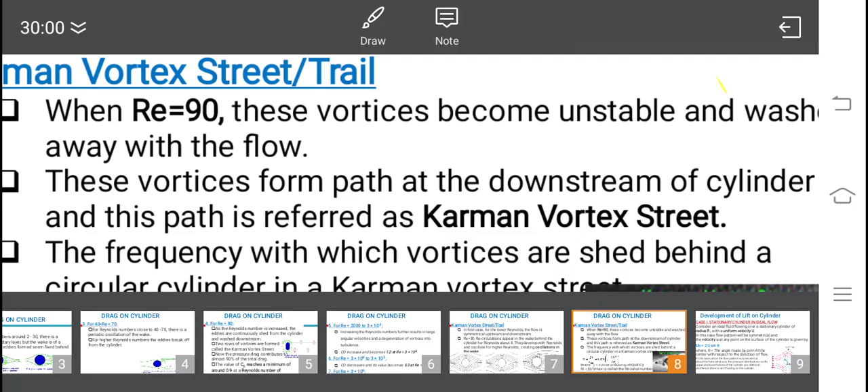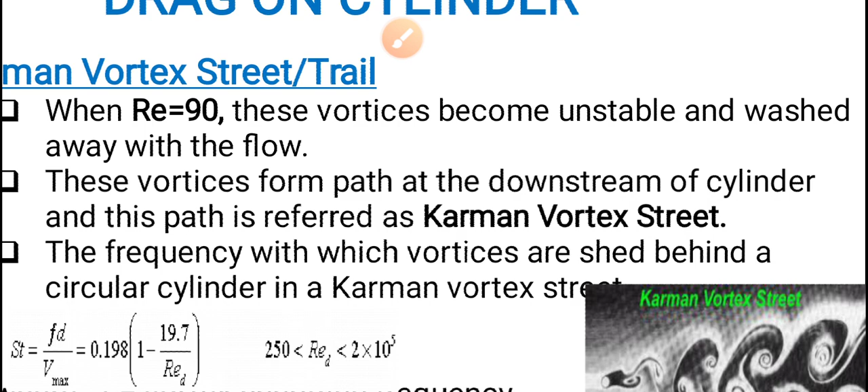Yesterday, in the last class, we were discussing the Karman vortex street. The frequency, Karman vortex street frequency, is F. When we divide it by V maximum, we get the Strouhal number, which is a dimensionless quantity, given by S suffix T equals Fd divided by V maximum, equal to 0.198. This is an empirical formula: 1 minus 19.7 divided by Reynolds number, where Reynolds number is greater than 250 and less than 2 into 10 to the power of 5.

We can see the vortices which are shed behind a circular cylinder in a Karman vortex street.

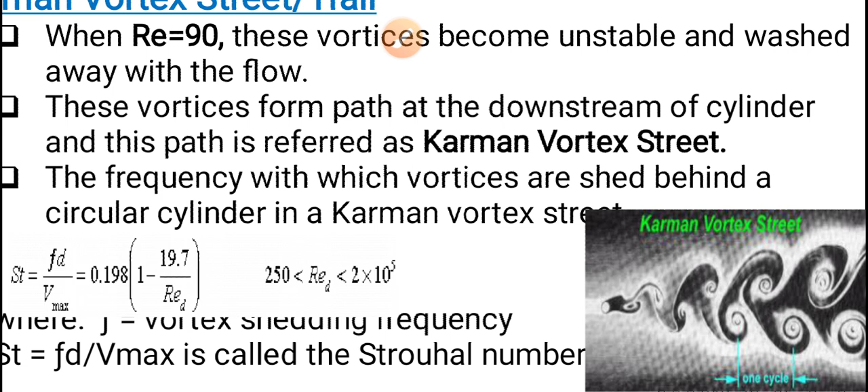Now one more thing in that Karman street, I would like to point out: singing of wires. What is singing of wires? When these vortices are formed and washed away onto the downstream side, there will be lateral vibrations on both sides. Because of these vibrations, there will be resonance caused when power cables, electrical wires, tall chimneys, and high-rise structures are exposed to heavy wind.

Because of these lateral vibrations caused at the resonance stage, they will cause harm to these infrastructures. This phenomena of singing, the musical noise produced by power cables or electrical wires when they are exposed to heavy wind and subjected to lateral vibrations, is known as singing of wire.

What is the word? Singing of wire. You must have come across this when going near an established transformer. For example, when you go to Loni, at Babaleshwar, there are big power cables and a transformer erected there. If you wander there in the evening or morning, you will hear some noisy musical sound; that is known as singing of wire.

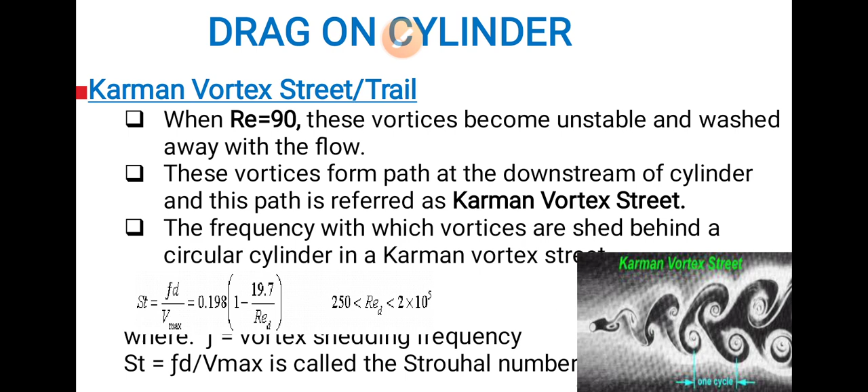Next, we will see the development of lift on a cylinder and sphere.

Case 1: stationary cylinder in an ideal flow where viscosity is absent. In that case, the pressure distribution as well as the flow pattern is symmetrical on both sides, as shown in the figure.

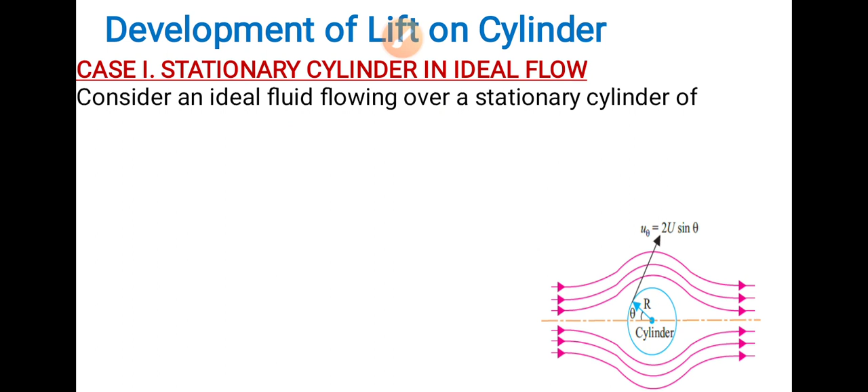Consider an ideal fluid flowing over a stationary cylinder of radius r with uniform velocity u meters per second. In this case, the flow pattern will be symmetrical, and the velocity at any point on the surface of the cylinder is given by u theta equals 2u sin theta. It is always tangential to the cylinder, as shown in figure, where theta is the angle made by the point at the center with respect to the direction of flow.

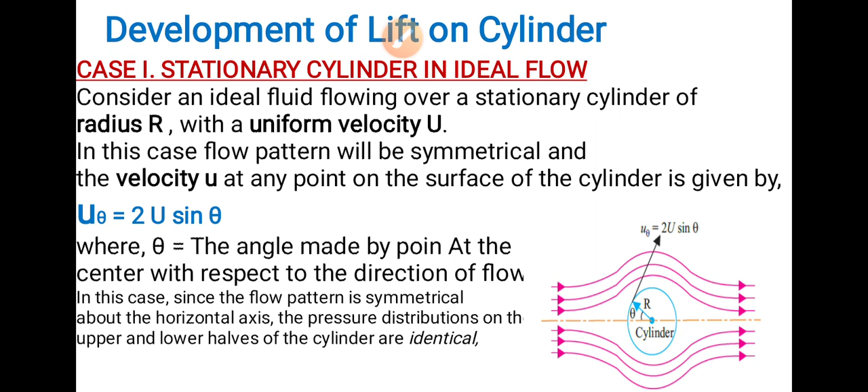In this case, since the flow pattern is symmetrical about the horizontal axis, the pressure distribution on the upper and lower halves of the cylinder are identical because of the symmetry with respect to the horizontal axis. Hence, there is no lift acting on the cylinder.

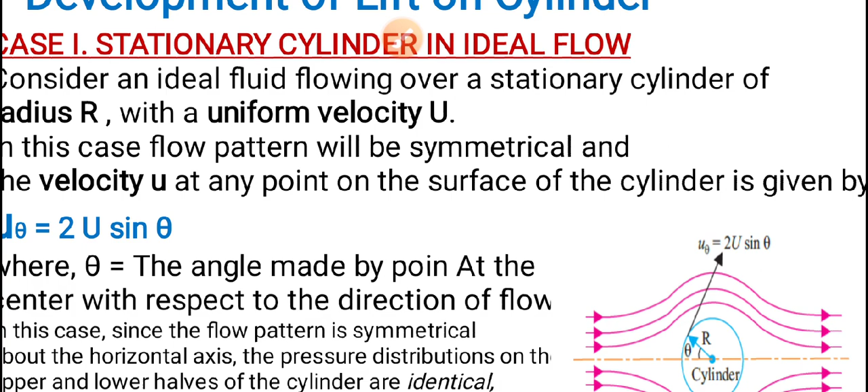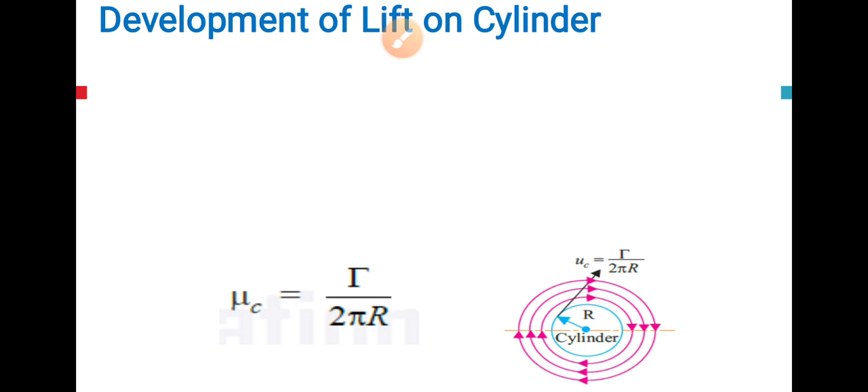Then, when a constant circulation is imparted onto the cylinder, the flow pattern around the cylinder consists of streamlines which are a series of concentric circles, as shown here. The peripheral velocity on the surface of the cylinder, because of the imparted circulation, is mu c equals circulation upon 2 pi r. This symbol resembles gamma, known as circulation, where capital R is the radius of the cylinder, and mu c is the velocity.

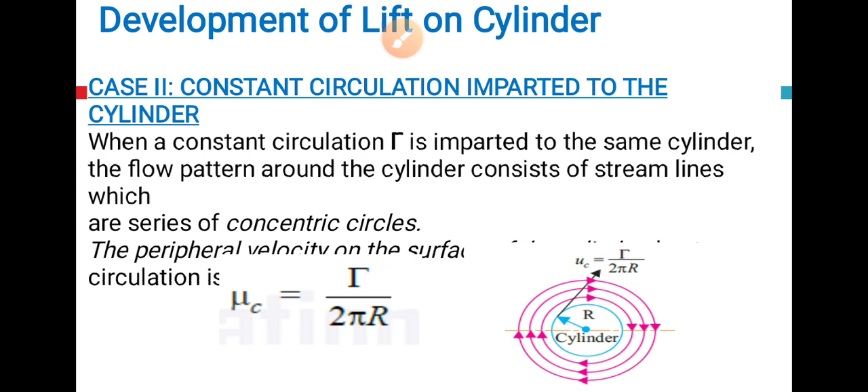Then the total velocity is not mu c, in fact uc. Therefore, the total velocity on the cylinder, when we superimpose these two flow patterns, that is the composite flow pattern, the above two flow patterns are superimposed one over the other, then a composite flow pattern as shown in the figure will be obtained.

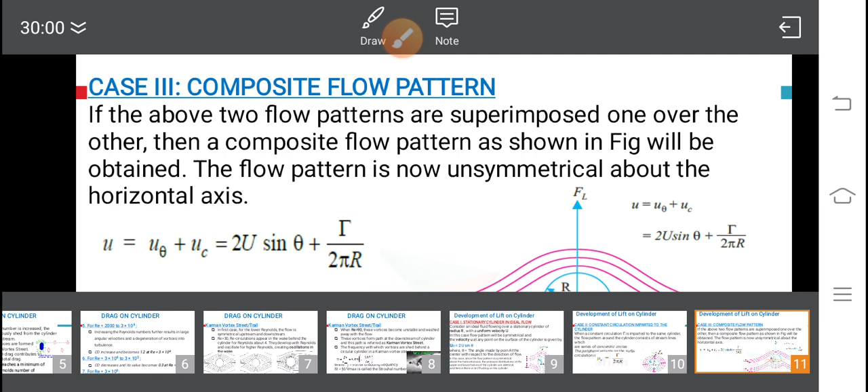The flow pattern is now unsymmetrical with respect to the horizontal axis. You can see with respect to the vertical axis it is symmetrical, whereas with respect to the x-axis, that is the horizontal axis, the upper half flow pattern and lower half flow pattern of the cylinder are unsymmetrical.

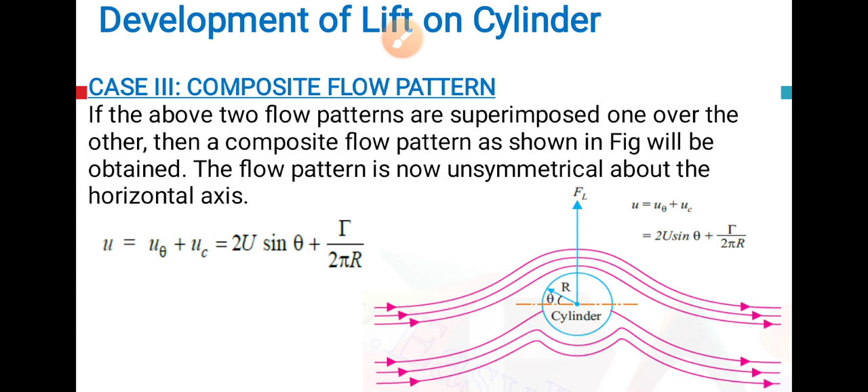Therefore, the total velocity u is equal to u theta plus uc, which is equal to 2u sin theta plus circulation divided by 2 pi r, that is gamma by 2 pi r.

Development of lift on the cylinder continued for case 3. Composite flow pattern, case 1 and 2 combined. As the circulation gamma has been taken as clockwise, the superimposition causes the velocity around the upper half portion of the cylinder to be higher than that around the lower half portion.

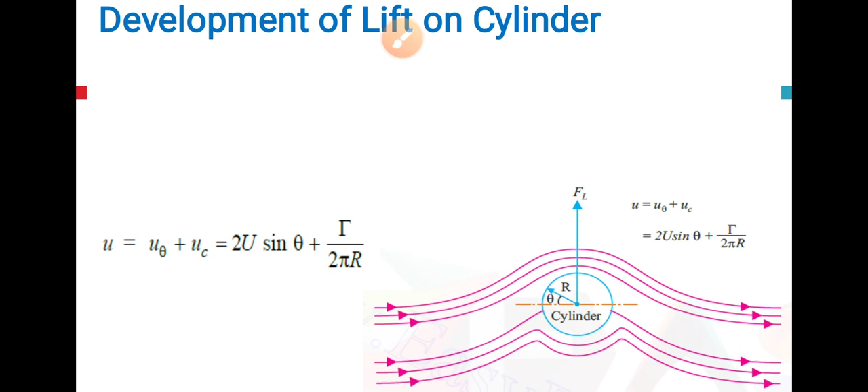This is so because around the upper half of the cylinder, the velocity of flow and the velocity due to circulation, being in the same direction, are added together, while around the lower half of the cylinder, both velocities, being in opposite directions, are subtracted. When superimposed, as shown in the previous figure, in the upper half they are added together, and in the lower half they are subtracted because they are acting in opposite directions there, while in the upper half they are acting in the same direction. That is the difference between these two in the case of the cylinder.

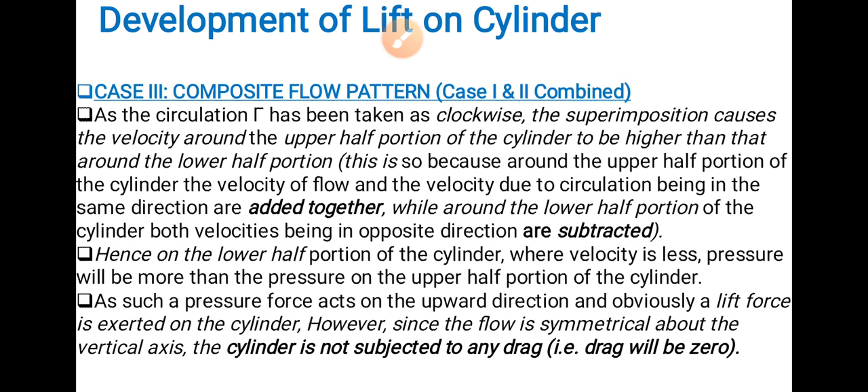Here I would like to mention one thing, the Magnus effect. Magnus effect is named after Magnus, a physicist who, in the year 1852, experimentally found that when a body like a cylinder is subjected to constant circulation in a fluid medium, it exerts a lift force, or a lift force is produced. This is known as the Magnus effect.

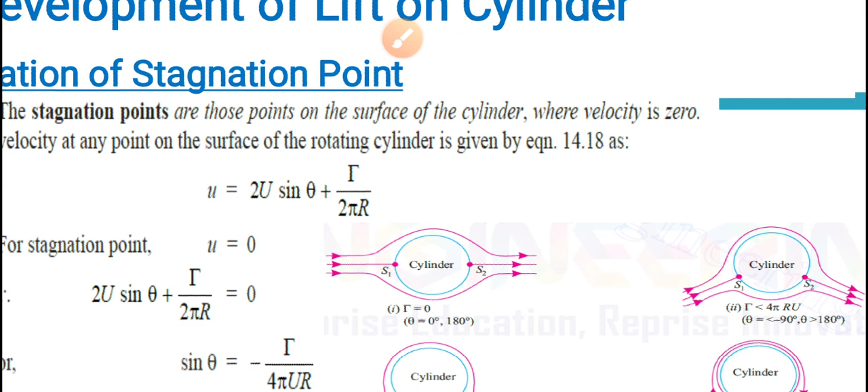Now, location of stagnation points. What is a stagnation point? A stagnation point is a point on the surface of the cylinder where velocity is zero. Velocity at any point on the surface of the rotating cylinder is given by the equation u is equal to 2u sin theta plus circulation upon 2 pi r. So we will continue in the next class.